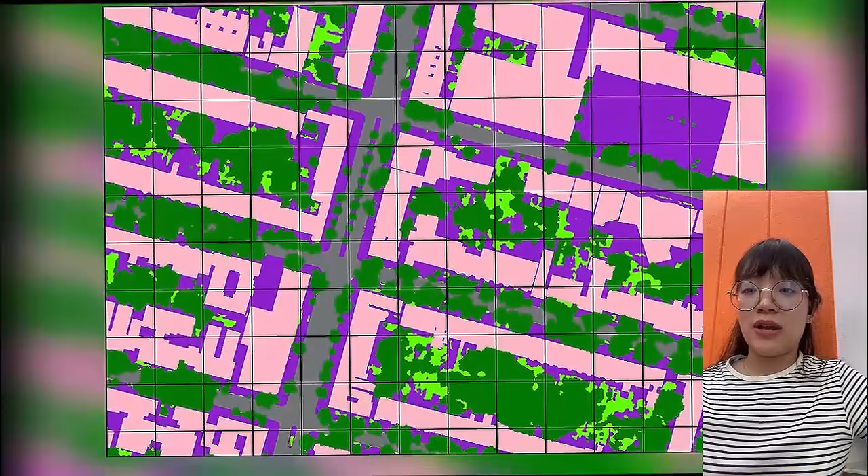Beyond the economic benefits, solar-powered buildings represent an important step toward a more sustainable future. They reduce greenhouse gas emissions, lower dependence on fossil fuel, and encourage the widespread adoption of renewable energy technology.

As governments around the world strengthen environmental regulations and pursue ambitious carbon neutral goals, energy-generating buildings are becoming symbols of innovation, responsibility, and environmental stewardship. Today, the idea of a building acting as its own power station is no longer a distant dream. It has become one of the defining trends of 21st century green architecture.

Around the world, groundbreaking projects demonstrate that buildings can do much more than provide shelter. They can actively produce clean energy, protect the environment, and reshape the future of sustainable urban living. As technology continues to evolve, the buildings of tomorrow may no longer be remembered simply for their height or appearance, but for their remarkable ability to generate the very energy that powers modern civilization.

Along with this rapid urban development comes an enormous increase in energy consumption. From air conditioning systems and elevators to computers, lighting, electric vehicles, and smart appliances, modern life depends on a constant and reliable supply of electricity. Experts predict that global energy demand will continue to rise for decades, placing unprecedented pressure on existing power grids.

For more than a century, much of the world's electricity has been generated by burning fossil fuels such as coal, oil, and natural gas. While these energy sources have fueled economic development and technological progress, they have also produced enormous amounts of carbon dioxide and other greenhouse gases.

These emissions trap heat in the Earth's atmosphere, contributing to global warming, rising sea levels, more frequent extreme weather events, and the gradual destruction of ecosystems around the world. The environmental cost of traditional electricity generation has become one of the great challenges facing humanity in the 21st century.

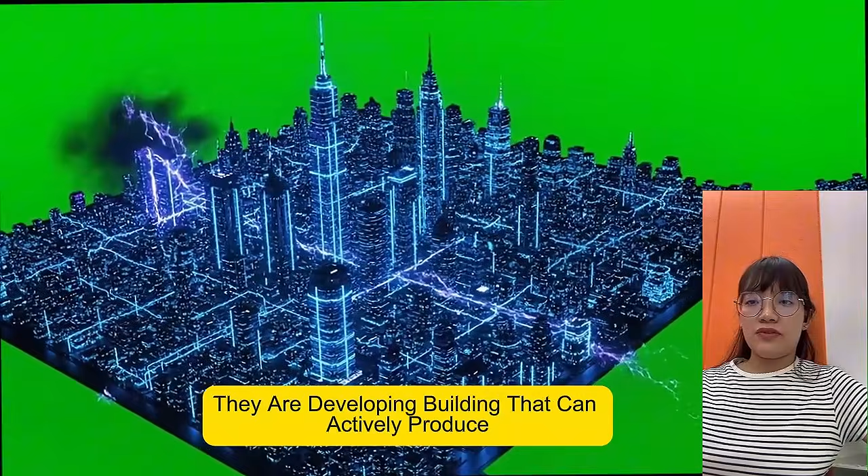This growing crisis has inspired architects, engineers, and environmental scientists to rethink the role of buildings in the global energy system. Instead of designing structures that simply consume electricity, they are developing buildings that can actively produce clean, renewable energy while minimizing waste. This represents a major shift in architectural philosophy.

Today, successful buildings are no longer judged solely by their appearance, height, or functionality. Increasingly, they are evaluated by how efficiently they use resources, how much energy they can generate, and how small their environmental footprint is. The goal is to transform every building into a self-sustaining energy system.

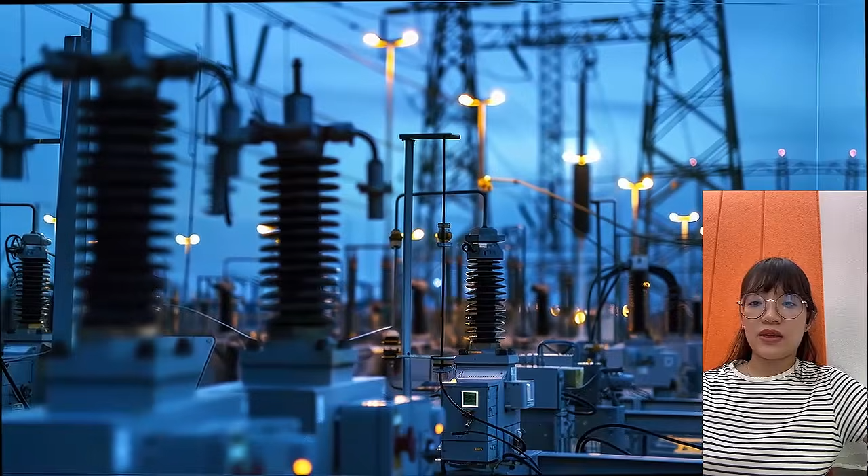Rather than relying entirely on electricity supplied by distant power plants, modern buildings can harvest energy directly from natural resources available on site. Solar panels capture sunlight throughout the day. Rooftop wind turbines generate electricity from moving air. Geothermal systems utilize the Earth's natural heat.

An advanced energy management system optimizes power consumption in real time. Together, these technologies enable buildings to produce a significant portion, or even all, of the electricity they require for daily operation. The benefits of solar power buildings extend far beyond lower electricity bills.

One of the most significant advantages is a dramatic reduction in greenhouse gas emissions. Every unit of renewable electricity generated by a building reduces the need for electricity produced by fossil fuel power plants, helping to combat climate change and improve air quality.

At the same time, building owners can save substantial amounts of money by reducing their dependence on the public electrical grid. Over the lifetime of a building, these savings amount to millions of dollars, making renewable energy investment economically attractive as well as environmentally responsible.

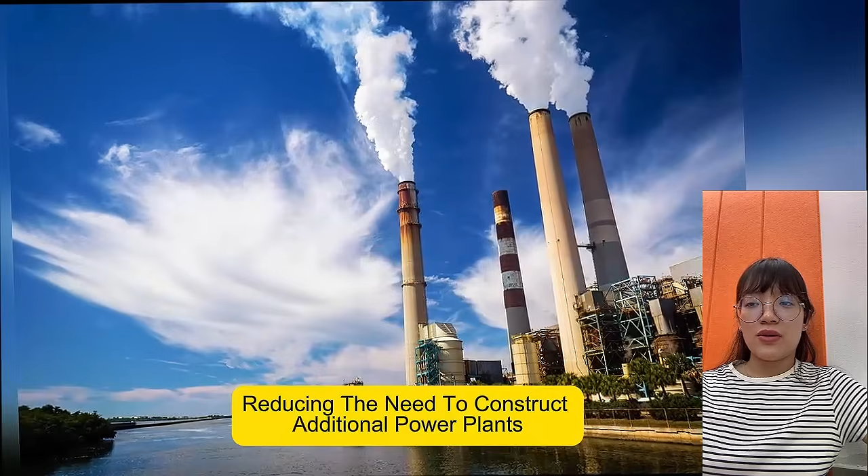Self-generating buildings also place less strain on national electricity networks. When thousands of buildings produce their own electricity, the overall demand on the grid decreases, reducing the need to construct additional power plants and expensive transmission infrastructure.

Some advanced buildings can even generate surplus electricity and feed it back into the public grid, effectively becoming small renewable power stations that support the surrounding community. This decentralized approach creates a more flexible, reliable, and sustainable energy system for the entire city.

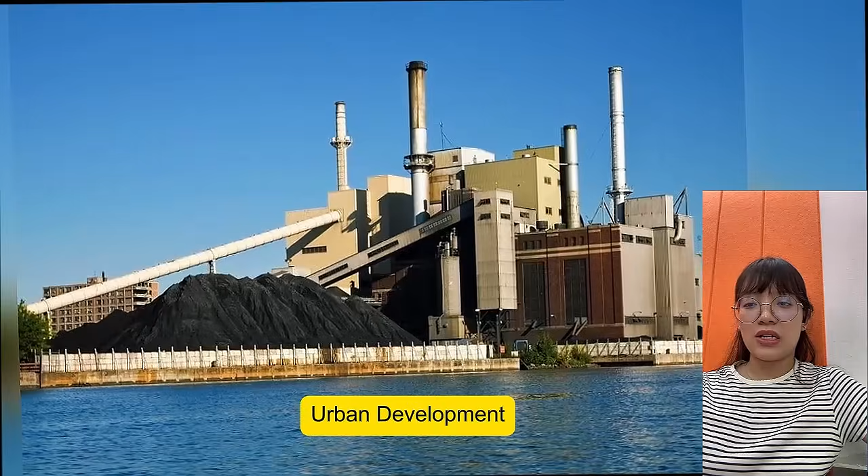Beyond the technical and financial advantages, energy-producing buildings represent a new vision for sustainable urban development. They encourage innovation, promote cleaner technology, and demonstrate that economic growth and environmental responsibility can coexist.

Around the world, governments introducing energy efficiency standards and carbon reduction targets make solar power buildings an increasingly important part of future construction. Many experts believe that in the coming decades, the ability to generate renewable energy will become a standard feature rather than a luxury.

Just as modern buildings are now expected to include internet connectivity, efficient insulation, and smart technology. Future buildings may all be designed to produce their own electricity. In this new era of green architecture, every rooftop, facade, and structure surface can potentially become an energy source, helping cities become cleaner, more resilient, and better prepared for the challenges of the future.

Part 3. The Edge, one of the smartest office buildings in the world. One of the world's most outstanding examples of sustainable architecture is the Edge, an innovative office building located in Amsterdam, the Netherlands.

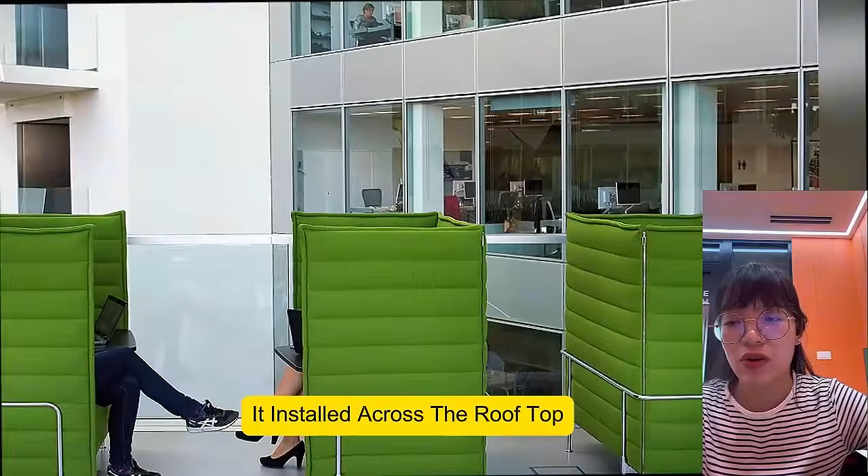One of the building's most impressive features is its extensive solar energy system. Thousands of high-efficiency photovoltaic panels are installed across the rooftop and integrated into parts of the building exterior. Throughout the day, these solar panels capture sunlight and convert it directly into renewable electricity.

The energy produced supplies a large portion of the building's daily power needs, including lighting, elevators, heating and cooling systems, ventilation equipment, and office electronics. By generating much of its own electricity, the Edge significantly reduces its dependence on the public power grid while lowering carbon emissions and operation costs.

However, what truly makes the Edge exceptional is not only the amount of electricity it generates, but also the way it uses the energy. The building is equipped with one of the world's most advanced smart sensor networks. Thousands of sensors are installed throughout the offices, meeting rooms, hallways, and social spaces. The intelligent devices continuously monitor occupancy, temperature, humidity, air quality, and lighting conditions in real time.

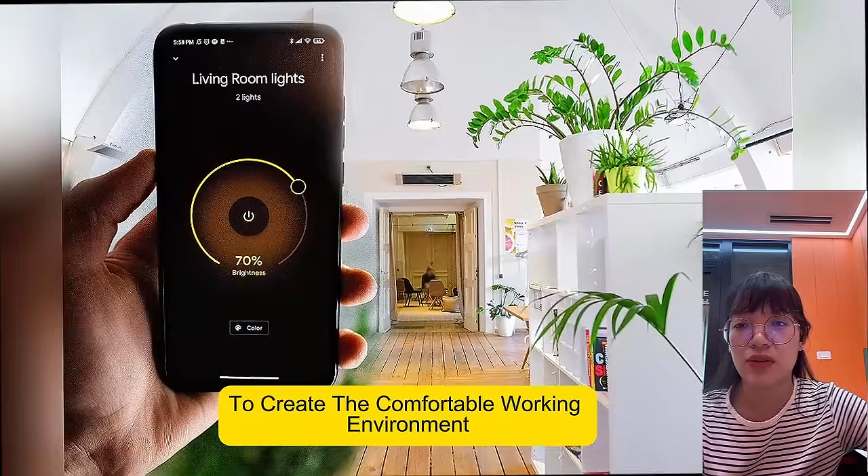Whenever an employee enters a room, the sensors immediately detect their presence. Lights automatically switch on and adjust their brightness according to the amount of natural daylight available. At the same time, the climate control system regulates the room temperature to create a comfortable working environment. Once the room becomes empty, unnecessary lighting and air conditioning are automatically reduced or turned off. As a result, electricity is consumed only where and when it is actually needed, eliminating much of the energy waste commonly found in conventional office buildings.

The building also makes excellent use of natural light. Large glass façades allow sunlight to reach deep into the interior, reducing the need for artificial lighting during daytime hours. Smart lighting systems constantly measure outdoor brightness and automatically adjust indoor illumination to maintain ideal working conditions while using the least possible amount of electricity.

All of this technology works together in an intelligent energy management system that continuously analyzes data and optimizes building performance. Every decision, from adjusting room temperature to controlling lighting, is designed to maximize comfort while minimizing energy consumption. This combination of renewable energy generation, artificial intelligence, and smart automation allows the building to achieve an extraordinary level of energy efficiency that far exceeds that of most traditional office buildings.

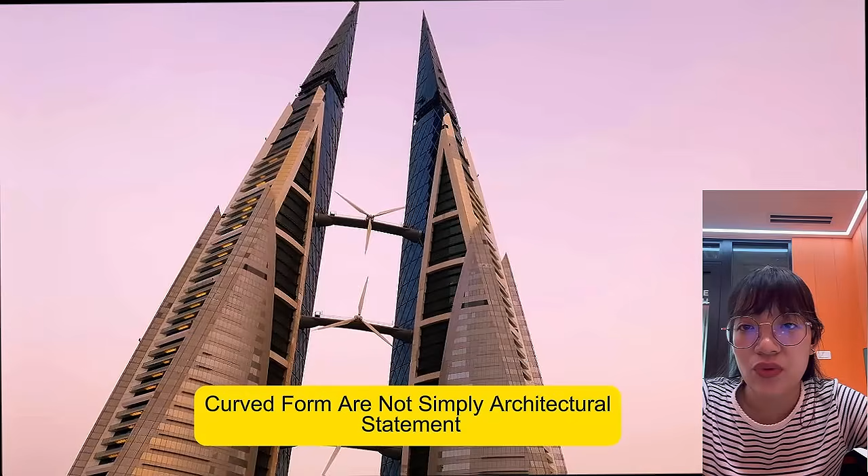Inspired by the traditional sail of the Arabian dhow, the towers reflect Bahrain's rich maritime heritage while also serving a highly practical engineering purpose. The unique curved forms are not simply architectural statements; they were carefully designed to manipulate wind flow and maximize renewable energy production.

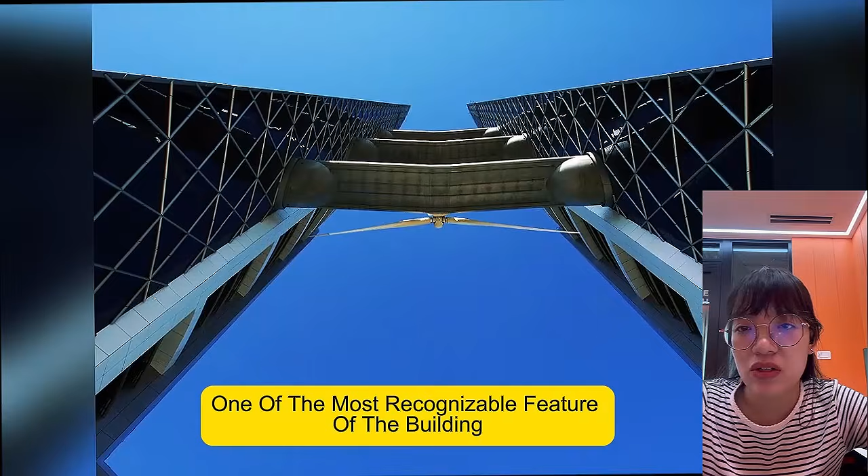Connecting the two towers are three enormous horizontal-axis wind turbines, each measuring approximately 29 meters in diameter. Suspended high above the ground on large steel bridges, these turbines create one of the most recognizable features of the building. Unlike conventional skyscrapers that rely entirely on electricity supplied by thermal power plants, the Bahrain World Trade Center is capable of generating part of its own clean energy by capturing one of the region's most abundant natural resources: wind.

The building's innovative design takes full advantage of the prevailing winds blowing across the Persian Gulf. Engineers carefully studied local wind patterns before construction began, using advanced computer simulation and wind tunnel testing to determine the optimal orientation of the towers.

The two sail-shaped structures are positioned so incoming wind naturally funnels into the open space between them. As the wind passes through the narrowing gap, its speed increases due to the venturi effect, a well-known principle in fluid dynamics where air accelerates as it flows through a confined passage. This natural acceleration allows the wind turbines to rotate more efficiently than they would if installed on conventional rooftops or in open fields.

Each of the three turbines operates independently, continuously converting the kinetic energy of moving air into electrical power. Whenever wind conditions are favorable, the spinning blades drive electrical generators that produce clean, renewable electricity without burning fossil fuel or releasing greenhouse gases. The electricity generated is supplied directly to the building, helping power common area lighting, elevators, ventilation systems, and various shared electrical facilities.

Although the wind turbines do not produce enough electricity to operate the entire skyscraper, they are capable of supplying a meaningful percentage of the building's annual energy demand under normal operating conditions. The turbines can provide approximately 11 to 15% of the building's total electricity consumption over the course of a year. This represents hundreds of megawatt-hours of clean energy and prevents the emission of hundreds of tons of carbon dioxide that would otherwise result from conventional electricity generation.

Integrating massive wind turbines into a high-rise building presents significant engineering challenges. The turbines need to withstand powerful wind, vibration, and changing weather conditions, and continue operation over many years. Engineers designed specialized steel bridges capable of supporting the turbines while minimizing structural movement and vibration. Advanced control systems constantly monitor wind speed, turbine rotation, and mechanical performance to ensure safe and efficient operation.

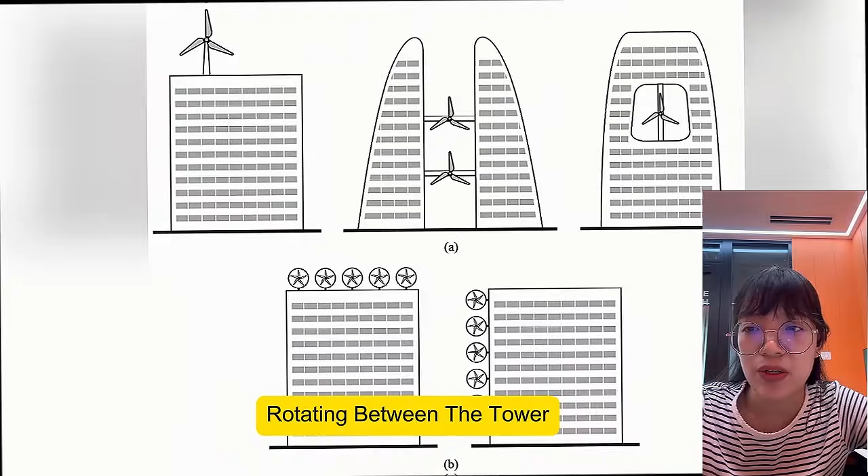Another remarkable achievement of the Bahrain World Trade Center is the way renewable energy technology becomes an integral part of the building's identity. Unlike many sustainable systems that remain hidden from public view, the three giant turbines are impossible to ignore. Visitors and residents can immediately see the blades rotating between the towers, providing a powerful visual reminder that clean energy can become a natural part of everyday urban life.

The building itself serves as an educational symbol, demonstrating that renewable energy technology can be both functional and architecturally inspiring.

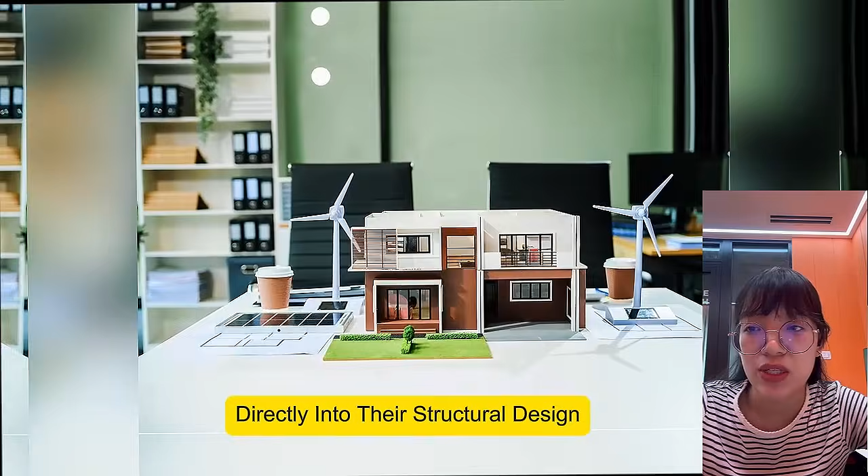Beyond the technical innovation, the Bahrain World Trade Center has a lasting influence on sustainable architecture around the world. Before its construction, very few skyscrapers had attempted to incorporate large-scale wind power directly into their structural design. Its success proved that renewable energy systems could be integrated into high-rise buildings without compromising aesthetics, safety, or commercial functionality. Since then, architects and engineers have explored new ways to incorporate wind energy into urban environments, drawing inspiration from the pioneering concept demonstrated in Bahrain.

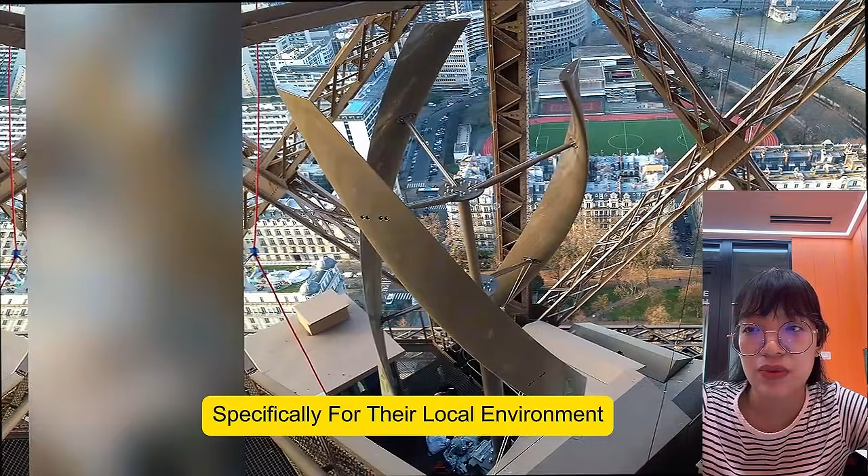The project also highlights the importance of designing buildings specifically for their local environment. Rather than applying a one-size-fits-all solution, the architects carefully considered Bahrain's climate, geography, and prevailing wind conditions. The result is a building uniquely adapted to its location, showing that sustainable architecture depends on understanding and working with nature instead of resisting it.

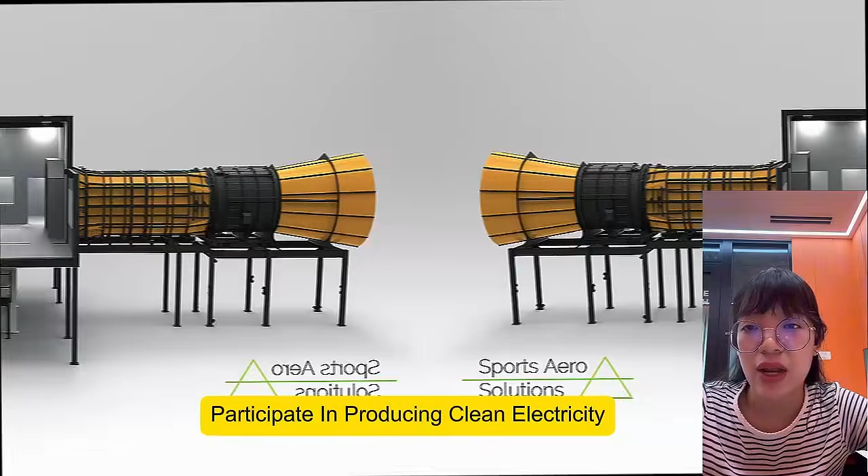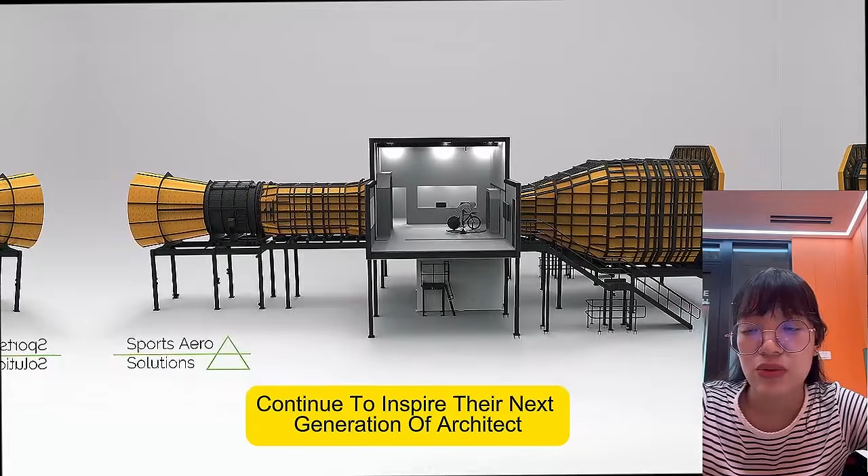Today, the Bahrain World Trade Center remains one of the world's most iconic examples of renewable energy architecture. It stands as proof that skyscrapers can become more than places to live and work. They can actively participate in producing clean electricity while reducing dependence on fossil fuels. As cities continue searching for innovative ways to lower carbon emissions and improve energy efficiency, this remarkable building continues to inspire the next generation of architects, engineers, and urban planners. Its soaring towers and giant wind turbines symbolize a future in which architecture is no longer merely a consumer of energy, but an active contributor to a cleaner, greener, and more sustainable world.

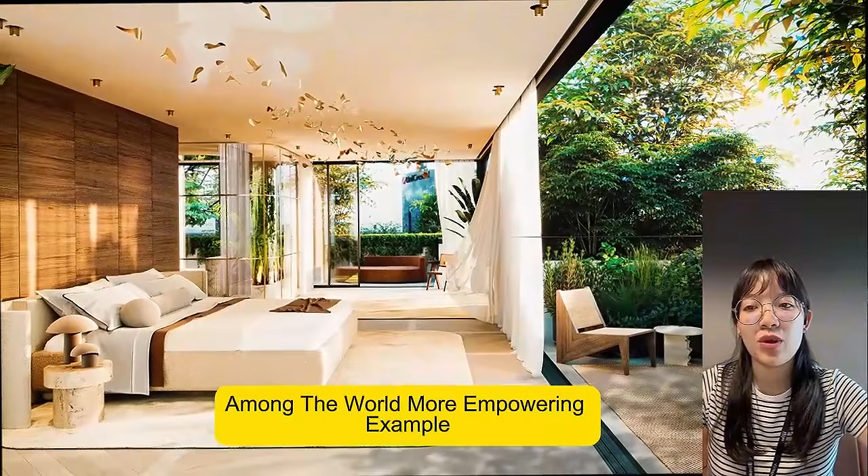Part 5. Bosco Verticale, where nature and clean energy work together. Among the world's most inspiring examples of sustainable architecture is Bosco Verticale, the vertical forest.

Located in Milan, Italy, unlike most modern skyscrapers that rely primarily on steel, glass, and concrete.

Bosco Verticale introduces an entirely different vision of urban living, one in which nature becomes an essential part of the building itself. Covered with thousands of trees, shrubs, and flowering plants, this remarkable residential tower has become an international symbol of green architecture, demonstrating that living vegetation can work alongside advanced technology to create healthier, more energy-efficient buildings.

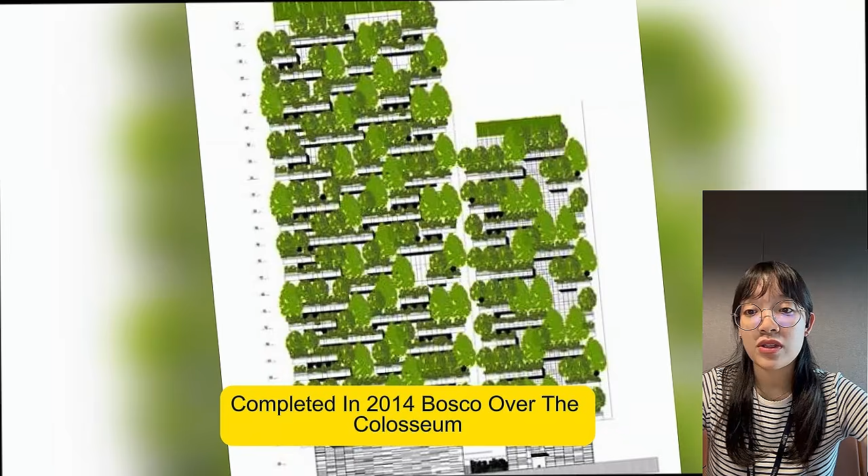Completed in 2014, Bosco Verticale consists of two residential towers rising approximately 80 and 112 meters above the city. What immediately captures attention is the extraordinary amount of greenery covering the balconies. More than 800 mature trees, over 4,500 shrubs, and approximately 15,000 perennial plants have been carefully planted throughout the building. Together, this vegetation is equivalent to the ecological benefits of a small forest, spread vertically across the facades instead of occupying valuable land at street level.

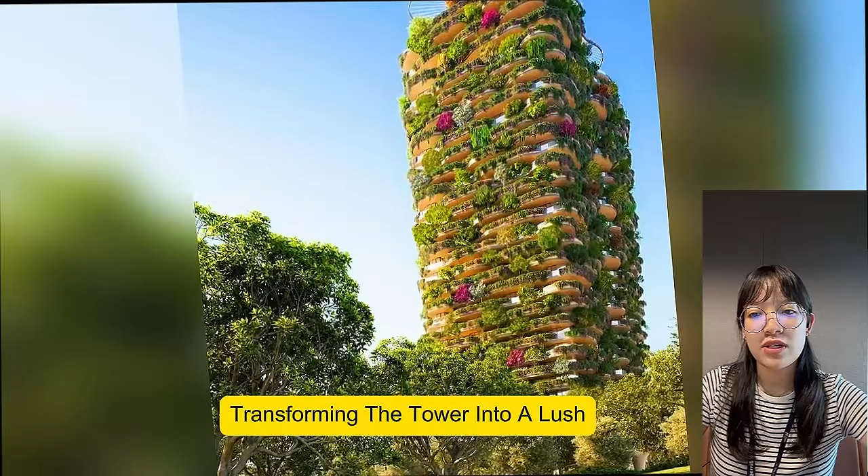At first glance, the trees appear to serve only an aesthetic purpose, transforming the tower into a lush green landmark within the urban skyline. However, their true value extends far beyond beauty. Every tree and plant has been carefully selected and positioned to perform specific environmental functions that directly improve the building's energy efficiency while creating a healthier living environment for residents.

One of the greatest challenges faced by modern buildings is managing heat. During the summer months, sunlight striking glass windows and concrete walls causes indoor temperatures to rise rapidly.

Conventional buildings often rely heavily on air conditioning systems to maintain comfortable conditions, leading to enormous electricity consumption. Bosco Verticale approaches this challenge in an entirely different way by allowing nature to perform much of the work.

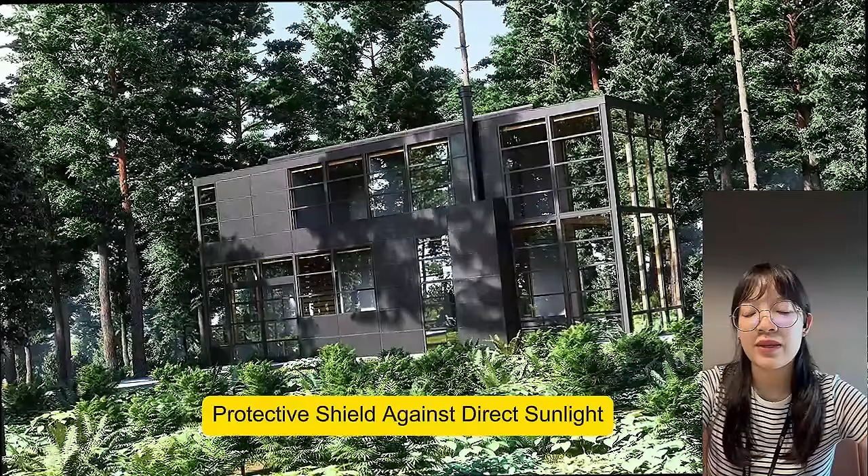The dense vegetation covering the balconies acts as a natural protective shield against direct sunlight. Tree canopies provide shade from windows, balconies, and exterior walls, preventing excess solar radiation from reaching the building envelope. As a result, significantly less heat enters the apartment, reducing indoor temperature naturally before mechanical cooling systems are even required. This passive cooling effect rapidly lowers the demand for air conditioning during Milan's warm summers, resulting in substantial energy savings.

The cooling benefits extend beyond simple shading. Through the natural process of transpiration, trees release water vapor into the surrounding air. As this moisture evaporates, it absorbs heat from the environment, producing a localized cooling effect similar to natural air conditioning. This process helps create a more comfortable microclimate, not only for residents but also for the surrounding neighborhood, contributing to the reduction of the urban heat island effect commonly experienced in large cities.

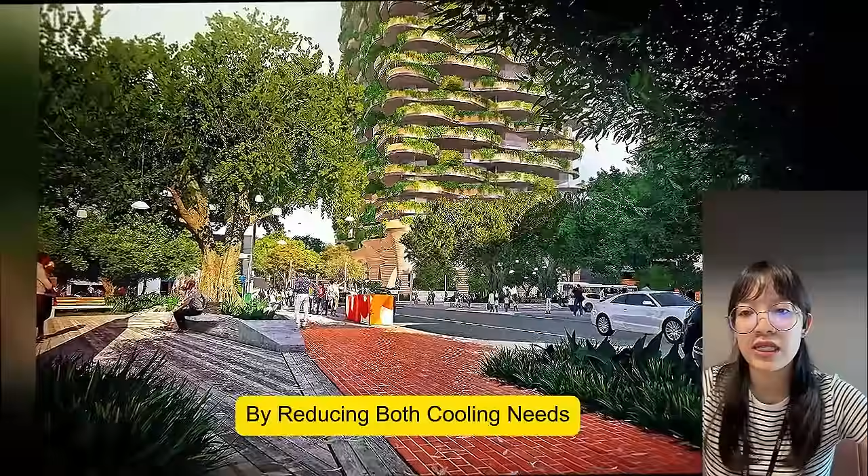During winter, the vegetation provides a different but equally valuable function. The branches and foliage create an additional insulating layer around portions of the building, helping reduce heat loss from the interior. Combined with modern insulation materials and high-performance windows, this natural barrier decreases the amount of energy required for heating. By reducing both cooling needs in summer and heating demand in winter, Bosco Verticale achieves impressive energy efficiency throughout the entire year.

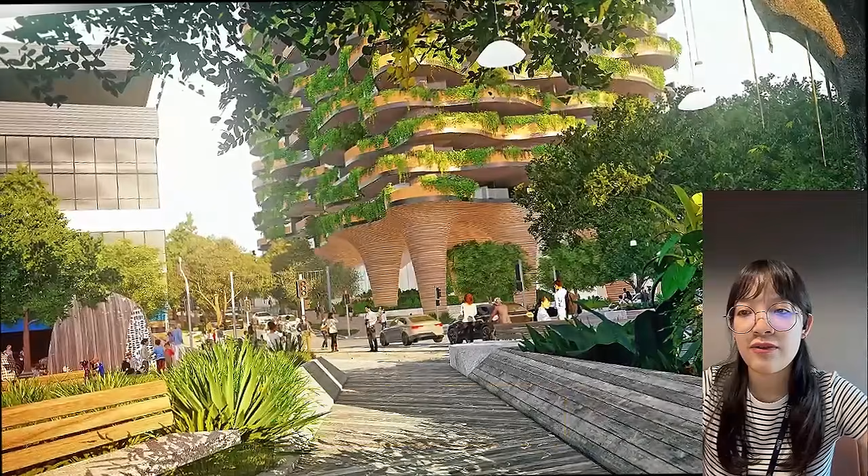Nature is only one component of the building's sustainability strategy. Bosco Verticale also operates modern renewable energy technology, including solar panels and advanced energy saving systems designed to reduce dependence on conventional electric resources. The solar installations contribute clean, renewable electricity that supports a portion of the building's energy requirements, while highly efficient mechanical systems ensure that every unit of energy is used as effectively as possible.

Sophisticated energy management technology continuously monitors lighting, ventilation, heating, and water consumption throughout the building. Efficient LED lighting, modern insulation materials, intelligent climate control systems, and optimized building operations work together with renewable energy generation to minimize electricity consumption without compromising resident comfort.

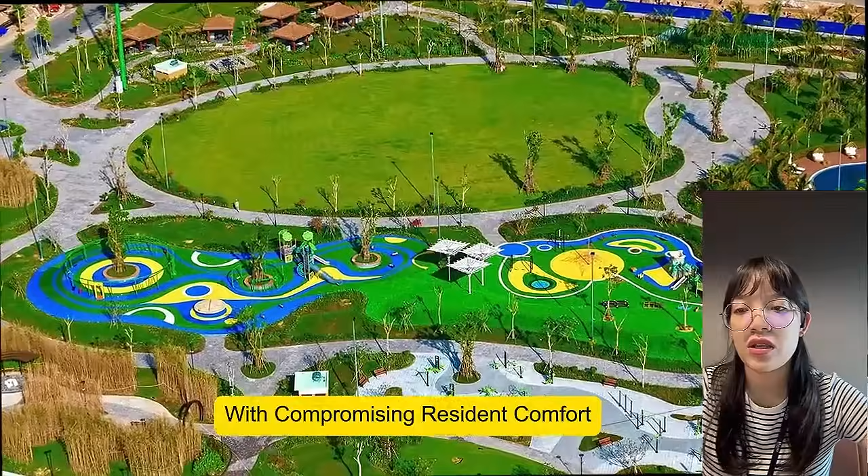Water management also plays a central role in maintaining the vertical forest. Irrigation systems use treated wastewater and a carefully controlled distribution network to provide trees and plants with the precise amount of water required. Sensors continuously monitor soil moisture and environmental conditions, ensuring healthy plant growth while minimizing unnecessary water use. This intelligent integration of technology and nature demonstrates that sustainable architecture depends upon carefully balancing multiple environmental systems.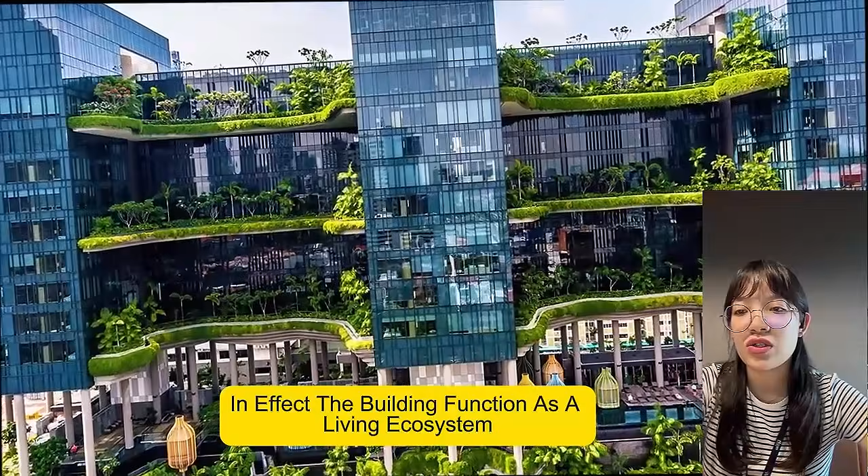Perhaps the most remarkable contribution of Bosco Verticale is its ability to improve urban air quality. The thousands of trees planted continuously absorb carbon dioxide while releasing oxygen into the atmosphere through photosynthesis. They also capture fine dust particles, filter airborne pollutants, and help reduce noise pollution throughout the surrounding area. In effect, the building functions as a living ecosystem rather than simply a collection of apartments.

The ecological benefits extend to wildlife as well. Birds, butterflies, bees, and numerous beneficial insects have found habitats among the extensive vegetation, increasingly supporting biodiversity within one of Europe's busiest metropolitan areas. What was once a conventional urban environment has been transformed into a thriving vertical ecosystem that supports both human life and local wildlife.

Bosco Verticale demonstrates important principles of sustainable architecture. Renewable energy does not always come directly from solar panels or wind turbines. Sometimes the most effective energy-saving solution comes from working with nature itself. Every degree of cooling provided by shade, every reduction in heating demand created by natural insulation, and every improvement in air quality achieved by living vegetation indirectly reduces electricity consumption.

In this sense, the forest covering the tower becomes a form of indirect energy generation, lowering the building's overall energy needs before electricity even has to be produced. Today, Bosco Verticale has become one of the world's most celebrated examples of environmentally responsible design.

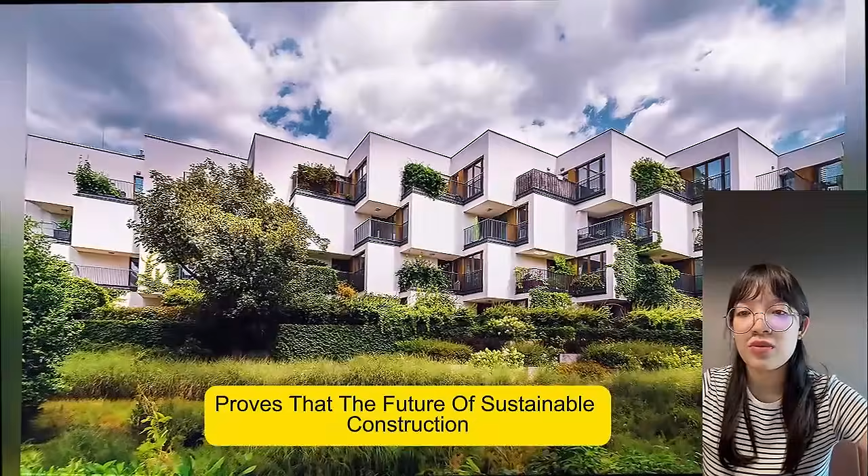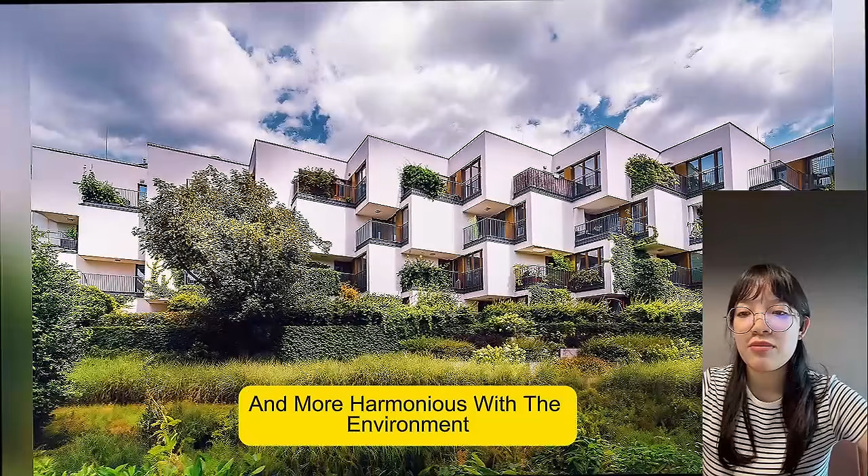Architects, urban planners, and governments from around the globe are studying an innovative approach as cities search for new ways to combat climate change, reduce carbon emissions, and improve the quality of urban life. More than just architecture, Bosco Verticale proves that the future of sustainable construction may not depend solely on advanced technology. Instead, it demonstrates that by combining renewable energy systems with the timeless power of nature, modern buildings can become healthier, more efficient, and more harmonious with the environment than ever before.

Part C: The building that produces more electricity than it uses. In the heart of Seattle, Washington, USA, stands one of the world's most remarkable examples of sustainable architecture, the Bullitt Center. Often described as one of the greenest commercial buildings ever constructed, it was designed with a bold and ambitious goal: to prove that a modern office building can operate without relying heavily on conventional energy sources, by producing more electricity than it consumes. Rather than simply reducing environmental impact, the building was created to become a positive contributor to the surrounding community, demonstrating what the future of sustainable construction can truly look like.

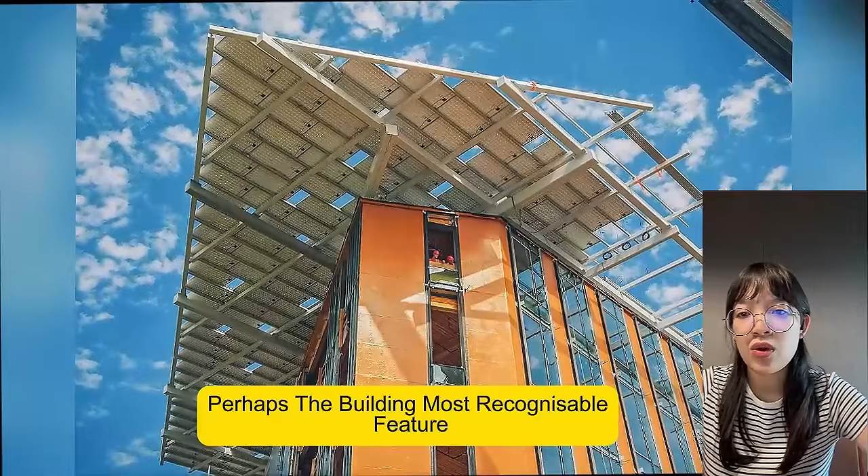Completed in 2013, the Bullitt Center immediately attracted international attention for its innovative approach to energy efficiency, water conservation, and environmental responsibility. Every aspect of the building was carefully planned to minimize resource consumption while maximizing renewable energy production. Instead of viewing sustainability as an optional feature, the architects and engineers treated it as the foundation of the entire project.

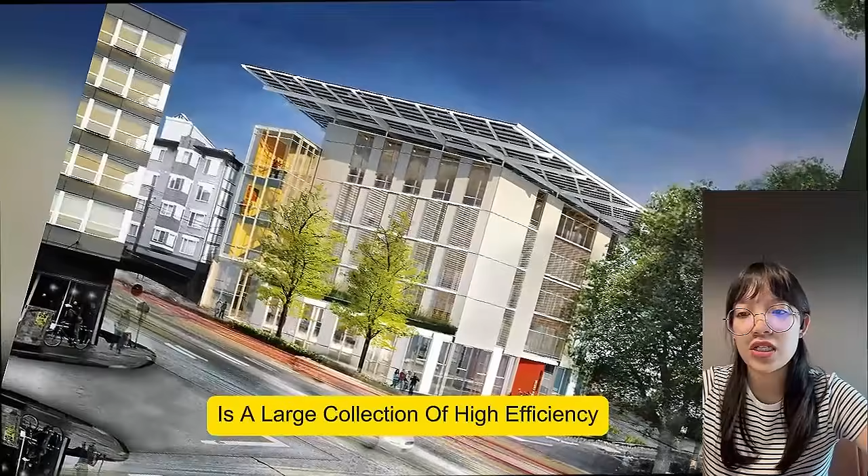Perhaps the building's most recognizable feature is the expansive rooftop solar array. Covering nearly the entire roof is a large collection of high-efficiency photovoltaic panels specifically designed to capture as much sunlight as possible throughout the year. Although Seattle is famous for its rainy weather and cloudy skies, careful engineering and advanced solar technology allow the Bullitt Center to generate an impressive amount of clean electricity, even under less than perfect conditions.

The rooftop solar system serves as the building's primary source of power throughout the day. Sunlight is converted directly to electricity that supplies lighting, computers, office equipment, elevators, ventilation systems, and many other essential building operations. Every kilowatt-hour generated by the solar panels reduces dependence on fossil fuel-generated electricity while lowering greenhouse gas emissions and operating costs.

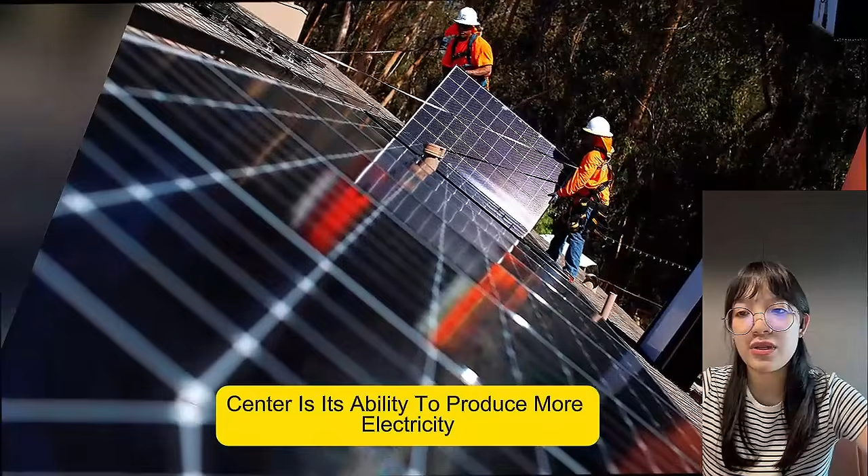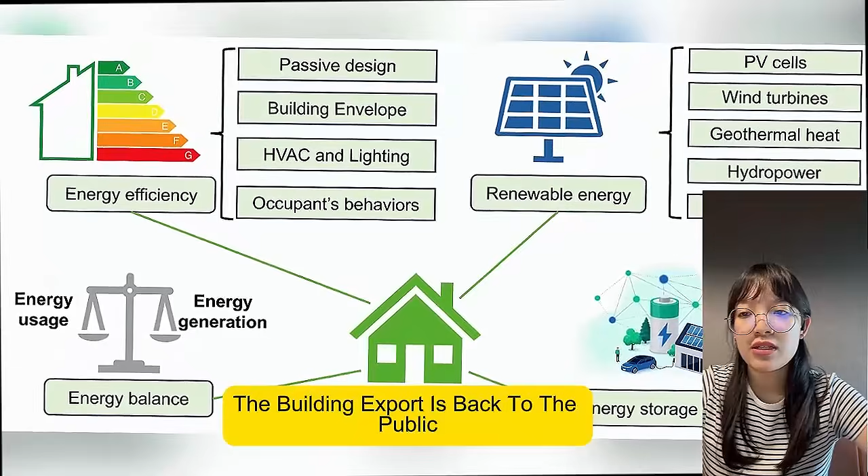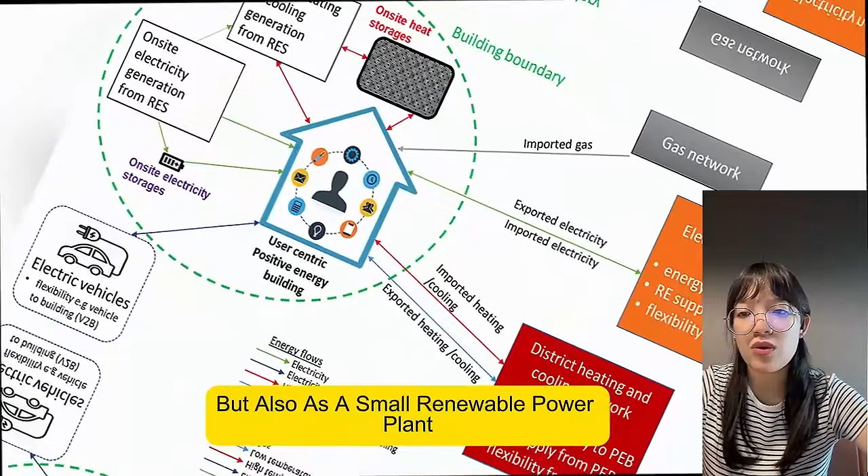One of the most extraordinary achievements of the Bullitt Center is its ability to produce more electricity than it consumes during favorable conditions. On bright sunny days, the solar array often generates a surplus of renewable energy that exceeds the building's immediate needs. Instead of allowing the excess electricity to go to waste, the building exports it back to the public electrical grid. In effect, the Bullitt Center functions not only as an office building, but also as a small renewable power plant that contributes clean energy to the surrounding community.

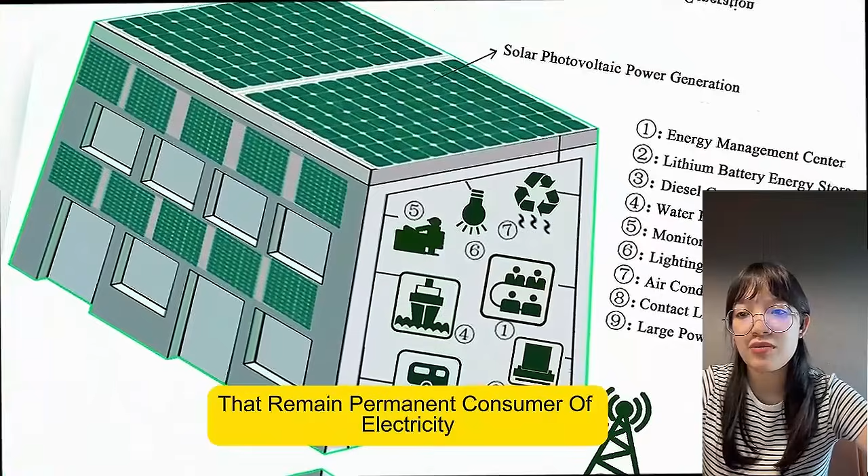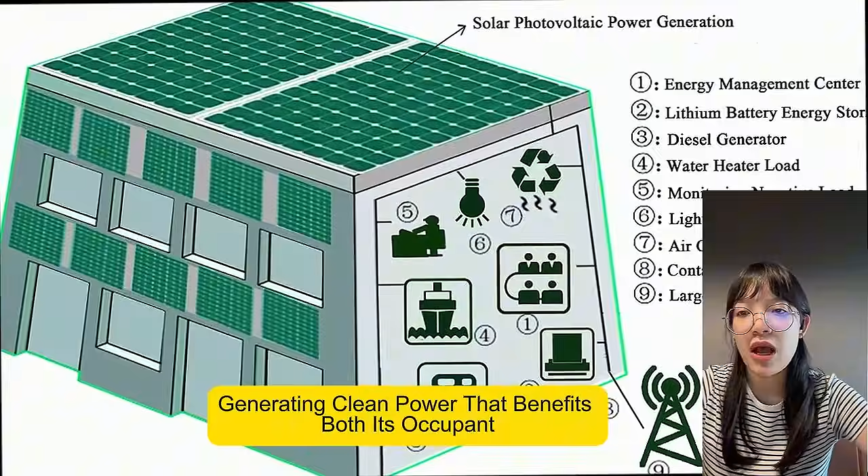This concept, often referred to as a net positive energy building, represents one of the highest standards in sustainable architecture. Unlike conventional buildings that remain permanent consumers of electricity, a net positive building becomes an active participant in the energy system, generating clean power that benefits both its occupants and neighboring properties. This approach demonstrates how a commercial building can help strengthen local energy infrastructure while reducing the need for electricity generated by coal, natural gas, or other fossil fuels.

However, renewable electricity generation alone does not explain the Bullitt Center's remarkable performance. Producing more energy than a building consumes is only possible because the building has been designed to require remarkably little energy in the first place. Every component has been optimized to maximize efficiency and eliminate unnecessary waste.

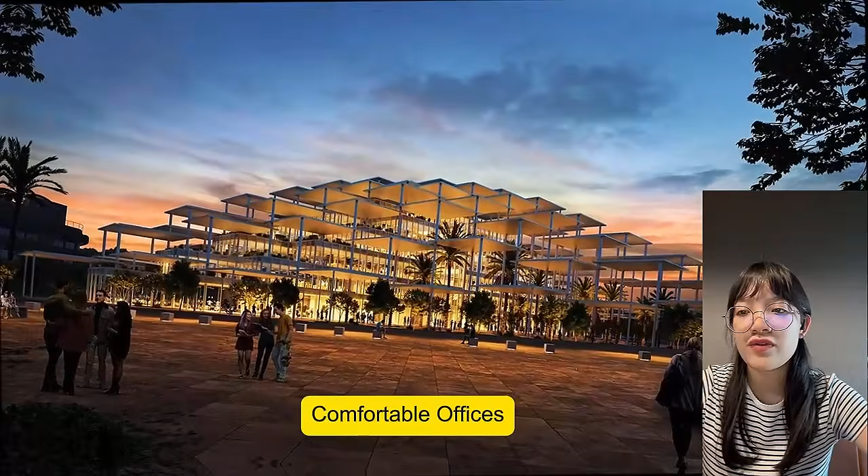Natural daylight plays a central role in the strategy. Large windows allow sunlight to penetrate deep into the interior, dramatically reducing the need for artificial lighting during daytime hours. Careful building orientation and architectural design ensure that workspaces receive abundant daylight while minimizing excessive heat gain. Employees enjoy bright, comfortable offices illuminated primarily by natural light rather than electricity. When artificial lighting is required, highly efficient LED fixtures are used throughout the building.

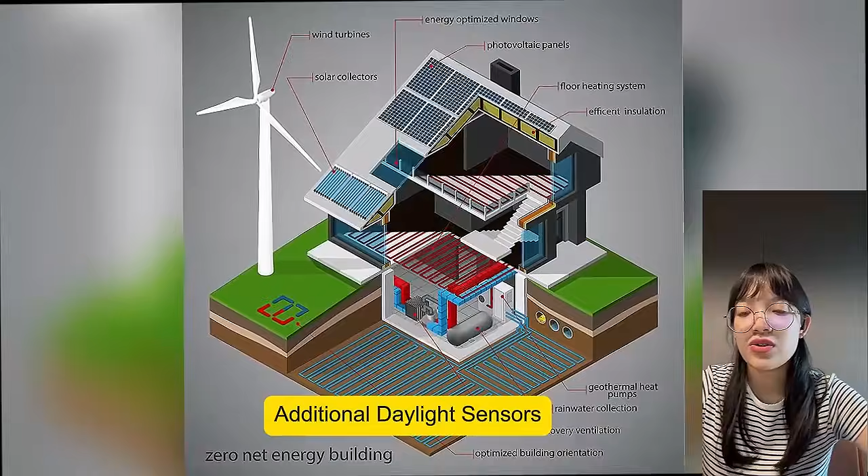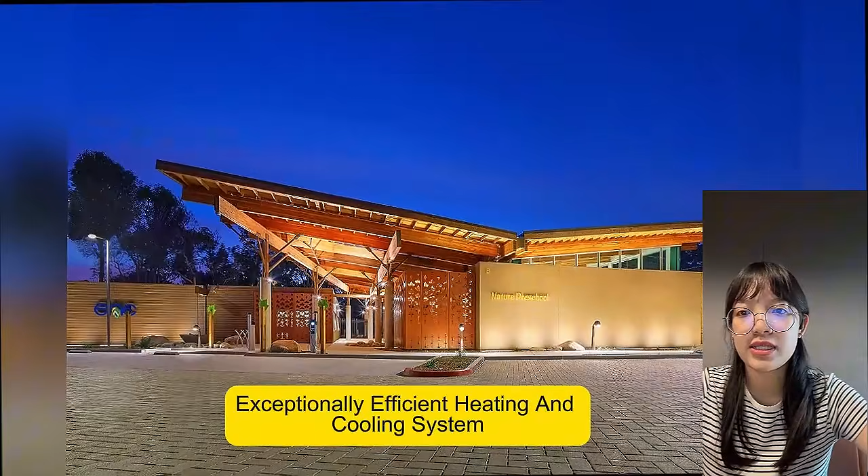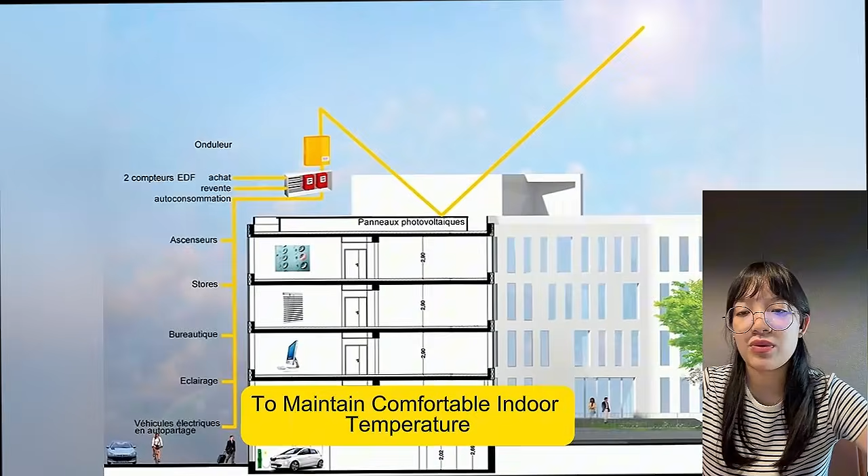Motion sensors and occupancy detectors automatically switch lights on only when rooms are occupied and turn off when spaces become vacant. Additional daylight sensors continuously adjust lighting intensity according to the amount of sunlight entering the building, ensuring that no electricity is wasted. The Bullitt Center also incorporates an exceptionally efficient heating and cooling system. Rather than relying on conventional air conditioning methods, the building uses advanced ventilation technology, superior insulation, and carefully engineered thermal systems to maintain comfortable indoor temperatures with minimal energy consumption. Operable windows allow occupants to enjoy fresh outdoor air whenever conditions permit, further reducing dependence on mechanical climate control equipment.

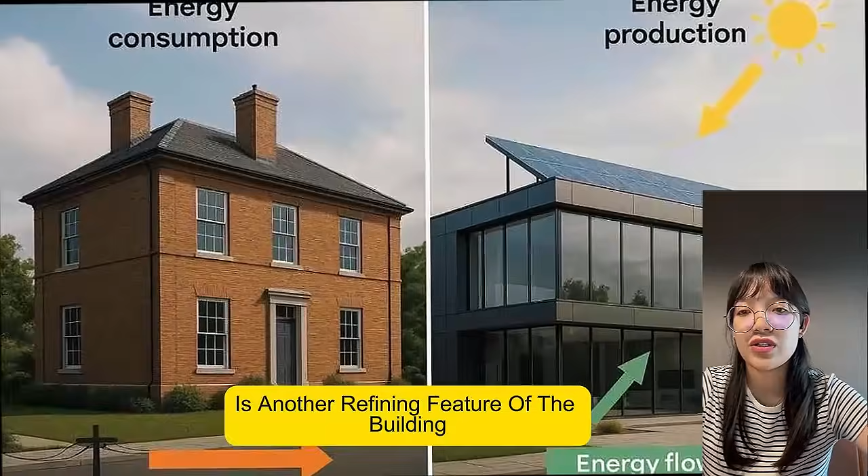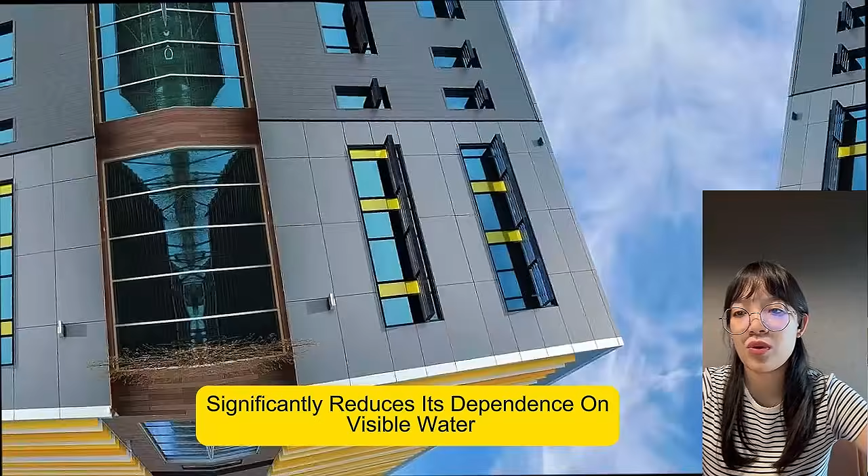Water conservation is another defining feature of the building's sustainable design. Rainwater falling onto the roof is carefully collected, stored, and given appropriate treatment for various building uses. This system significantly reduces dependence on municipal water supply while making productive use of one of Seattle's most abundant natural resources.

Advanced filtration technology ensures that collected rainwater meets strict quality standards before being utilized. The Village Center also incorporates innovative wastewater treatment and water recycling systems that radically reduce freshwater consumption. Water is carefully managed throughout the building to ensure every drop is used as efficiently as possible. Low flow plumbing fixtures, efficient appliances, and intelligent water management technology further minimize resource consumption while maintaining excellent performance per occupant.

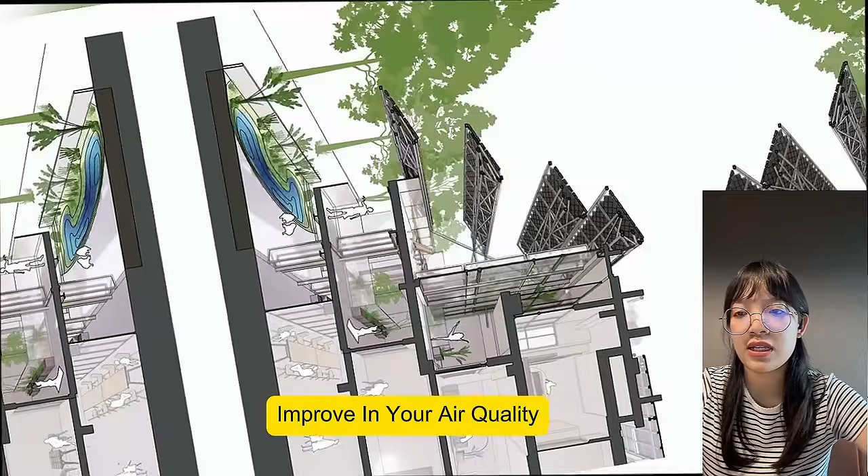Even the building materials reflect a commitment to sustainability. The environmentally responsible construction materials were selected to reduce harmful chemicals, improve indoor air quality, and ensure long-term durability. The design emphasizes products with low environmental impact throughout the entire life cycle, from manufacturing and transportation to maintenance and eventual recycling.

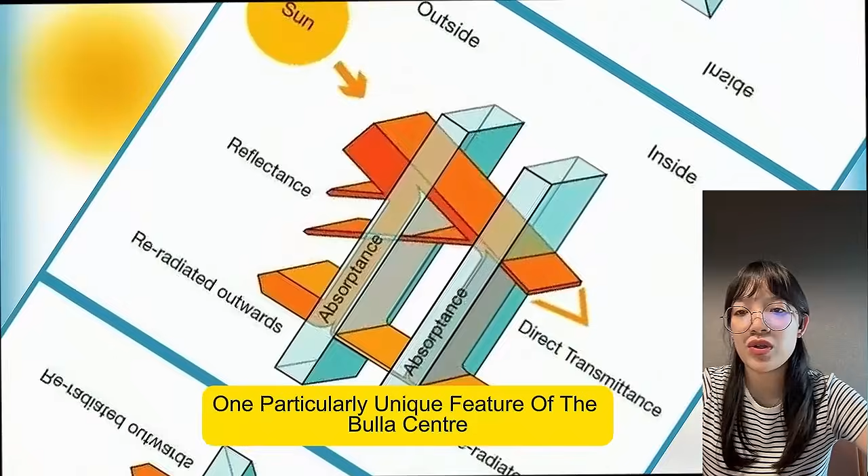One particularly unique feature of the Bullitt Center is the encouragement of a healthy lifestyle. Instead of placing an elevator at the center of the building, the architects designed an attractive, naturally lit staircase that encourages occupants to walk between floors whenever possible. This simple architectural decision reduces elevator use, saves electricity, and promotes physical activity among employees.

The Bullitt Center has become an international symbol of what is possible when renewable energy, intelligent engineering, and thoughtful architectural design are combined into a single vision. It's proof that commercial office buildings do not have to be major consumers of energy or contributors to climate change.

Instead, they can become highly efficient systems capable of generating clean electricity, conserving water, minimizing waste, and supporting a healthier working environment. Today, architects, engineers, government and environmental organizations around the world look to the Bullitt Center as a model for the future of sustainable construction.

Its success demonstrates that buildings can evolve beyond merely reducing their environmental footprint. They can actively create positive environmental benefits by producing more electricity than they consume, recycling valuable resources, and operating with extraordinary efficiency. The Bullitt Center offers a compelling glimpse into a future where buildings have the potential to become clean energy producers and essential parts of a more sustainable world.

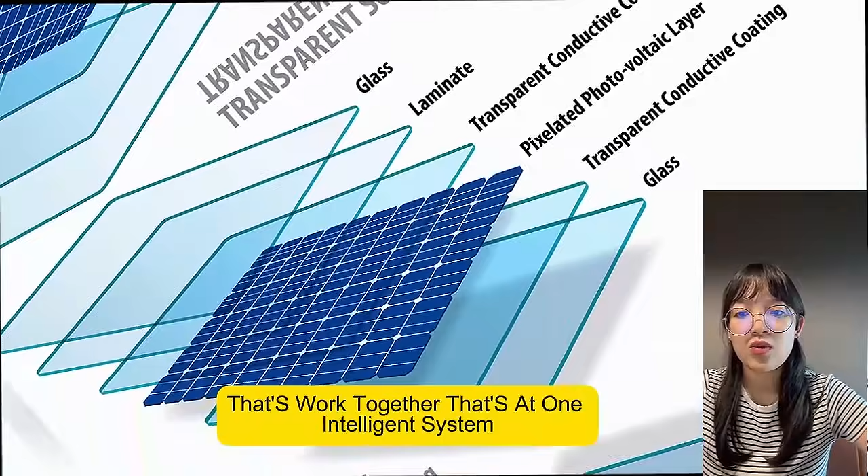Modern energy generating buildings rely on a combination of advanced technologies that work together as one intelligent system. Each technology plays a specific role in producing, storing, managing, and conserving energy, allowing the building to operate with far greater efficiency than traditional structures. By integrating multiple renewable energy sources with a smart management system, today buildings are becoming increasingly capable of meeting their own energy needs while reducing their dependence on the conventional power grid.

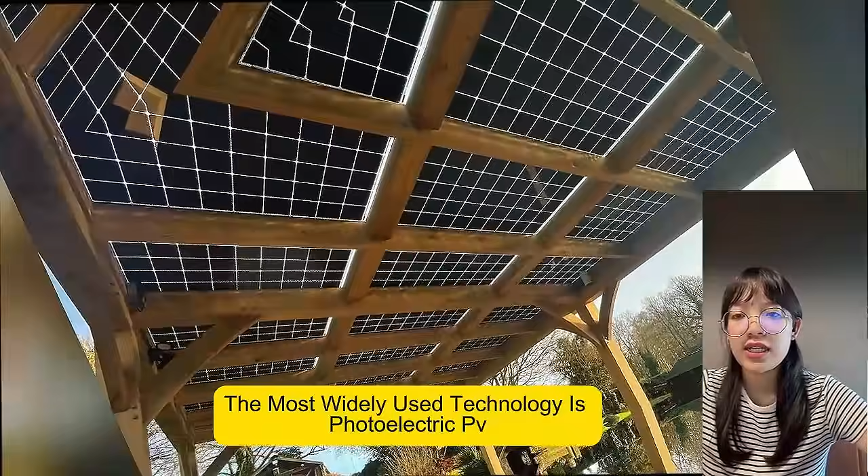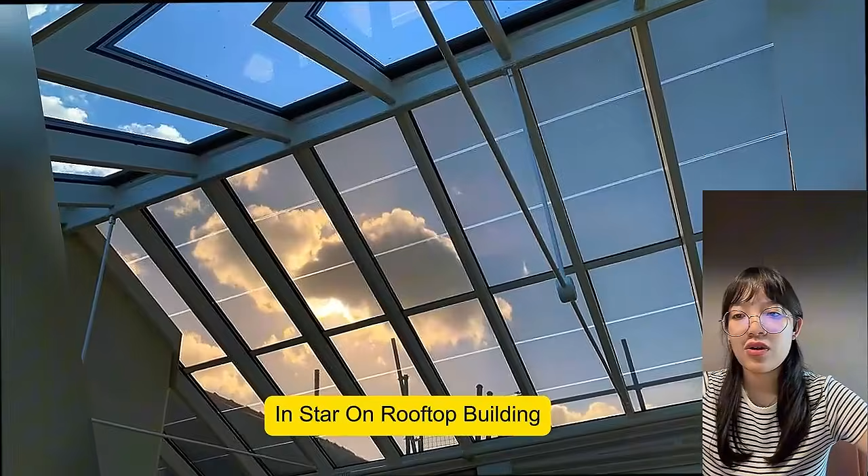The most widely used technology is photovoltaic, or PV, solar panels. These panels contain semiconductor material that converts sunlight directly into electricity through the photovoltaic effect. Installed on rooftops, building facades, or even integrated into architectural elements, solar panels quietly generate clean, renewable energy throughout the day without producing greenhouse gas emissions or air pollution.

As solar technology continues to improve, modern photovoltaic systems have become more efficient, more affordable, and capable of generating significant amounts of electricity even under partially cloudy conditions.

Another important source of renewable energy is wind power. Buildings located in areas with consistent airflow can incorporate wind turbines to capture the kinetic energy of moving air. Some skyscrapers are specifically designed to channel natural wind between towers, increasing wind speed and improving turbine performance. As the blades rotate, generators convert mechanical energy into electricity that can be used to power lighting, elevators, ventilation systems, and other building operations.

Wind energy complements solar power because it can continue producing electricity during cloudy weather and in many locations throughout the night.

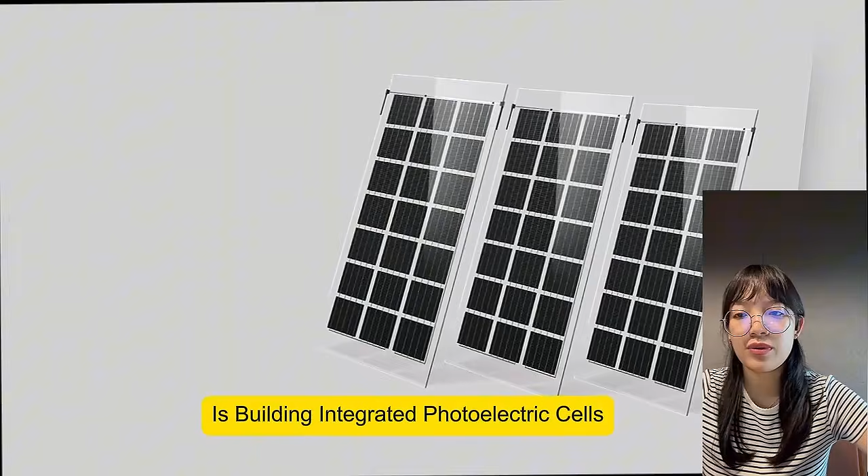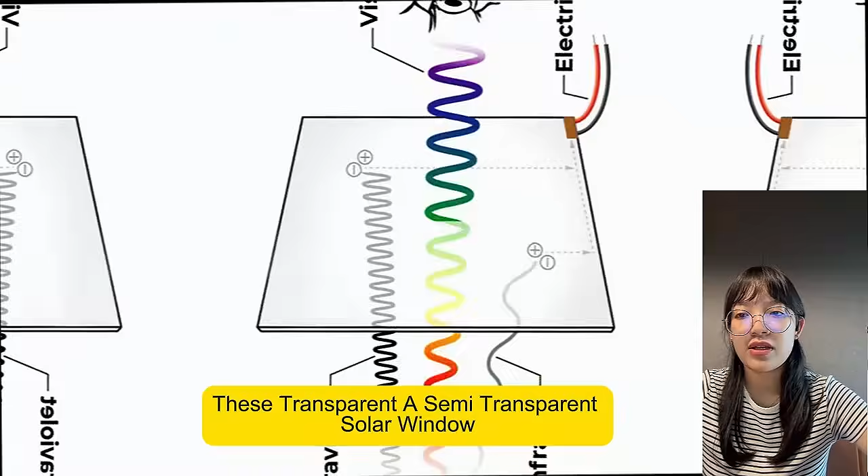One of the newest innovations in sustainable architecture is building integrated photovoltaics. Instead of placing solar panels only on rooftops, engineers have developed special glass panels that contain photovoltaic cells within the window or exterior facade. These transparent or semi-transparent solar windows allow natural daylight to enter the building while simultaneously generating electricity.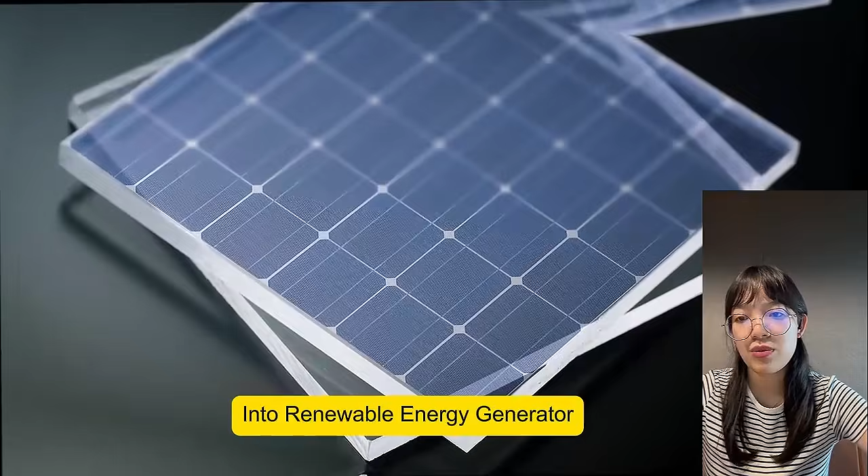As cities become increasingly crowded and rooftop space becomes more limited, photovoltaic glass offers an efficient way to transform entire building surfaces into renewable energy generators without compromising architectural design.

Closely related to this technology is the transparent solar panel, which can be installed directly onto a window while maintaining visibility. Although this system currently generates less electricity than conventional solar panels, ongoing research continues to improve their efficiency. In the future, millions of windows on office towers and residential buildings could become invisible power generators, dramatically increasing the amount of renewable energy produced in urban environments.

Many advanced buildings also utilize geothermal energy systems beneath the earth's surface.

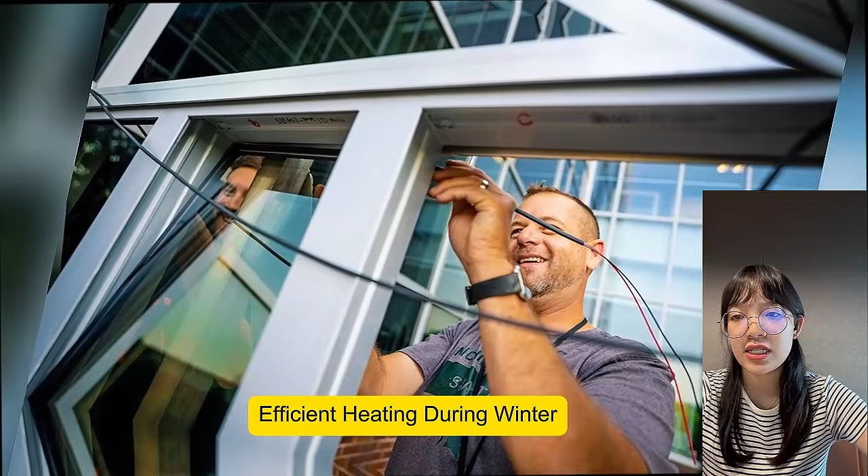Temperature remains relatively stable throughout the year. Geothermal heat pumps take advantage of constant underground temperature to provide highly efficient heating during winter and cooling during summer. By exchanging heat with the ground rather than relying solely on conventional heating and air conditioning equipment, geothermal systems significantly reduce electricity consumption while maintaining a comfortable indoor environment.

Another emerging technology is energy generating flooring, sometimes called kinetic flooring. These specially designed floor panels capture the mechanical energy produced when people walk across them. Every footstep creates a small amount of electricity that could be stored or used immediately to power nearby lighting, displays, or electronic devices. Although each individual step generates only a small amount of energy, busy locations such as airports, train stations, shopping malls, and sports stadiums can collectively produce meaningful amounts of renewable electricity from thousands of daily visitors.

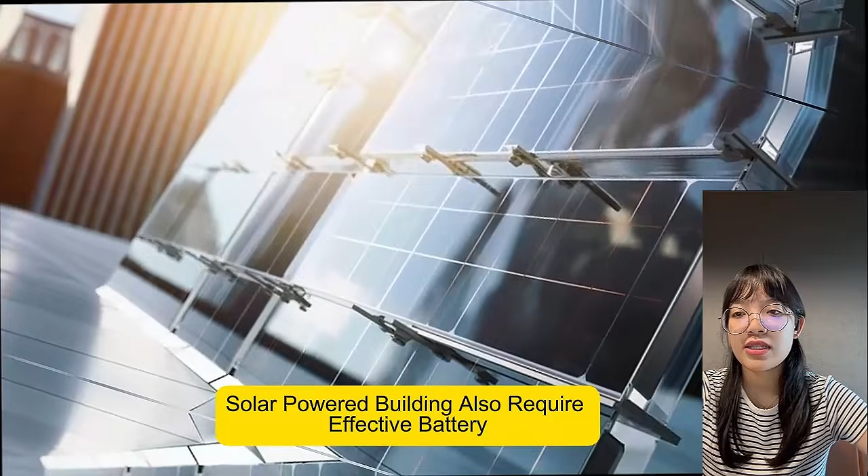Generating electricity is only part of the challenge. Modern self-powered buildings also require effective battery and energy storage systems. Since solar panels produce electricity only during daylight hours and wind conditions constantly change, batteries store excess renewable energy generated during periods of high production. This stored electricity can then be used at night, during cloudy weather, or whenever renewable energy generation temporarily decreases. Advanced battery technology increases energy independence while improving the reliability and stability of building operation.

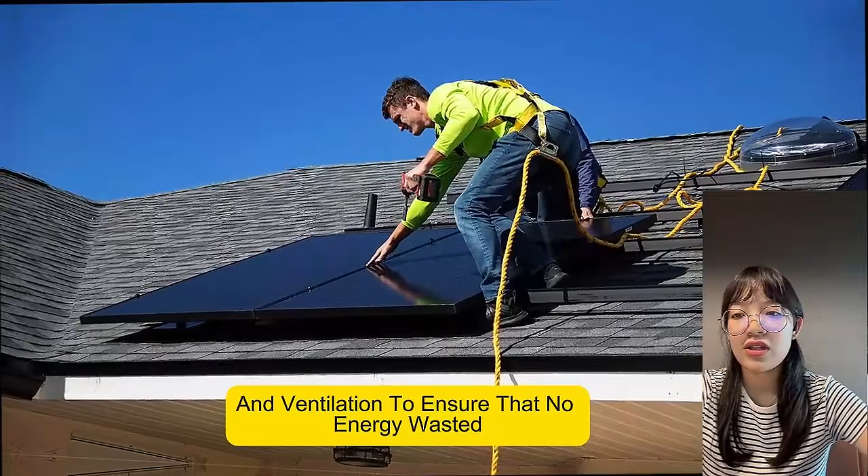Perhaps the most important technology connecting all these systems is artificial intelligence. Intelligent energy management software continues to monitor electricity production, weather forecast, occupancy level, battery capacity, and real-time energy consumption throughout the building. Using this information, the AI automatically determines when to store electricity, when to use renewable power directly, and when excess energy should be supplied back to the public grid. It can also optimize heating, cooling, lighting, and ventilation to ensure that no energy is wasted. By making thousands of automated decisions every day, artificial intelligence significantly improves the overall efficiency of modern energy producing buildings.

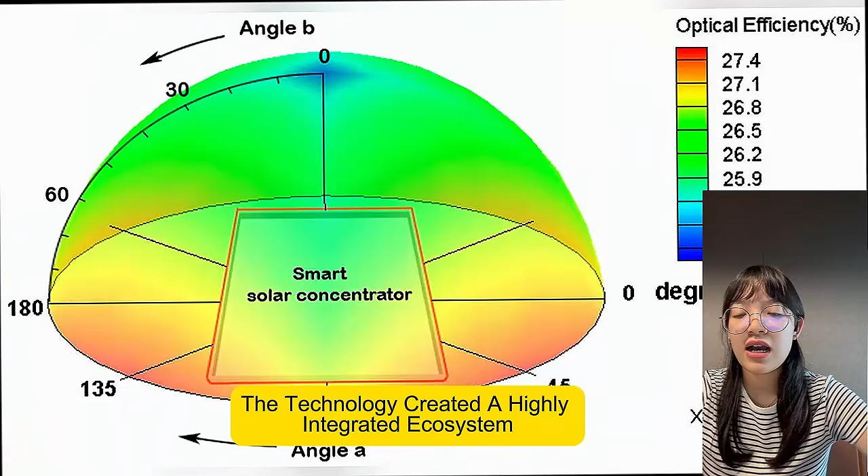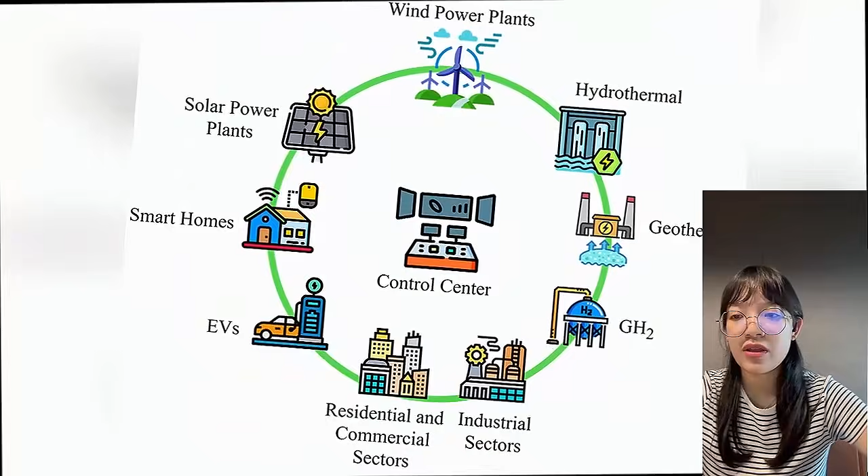Together, these technologies create a highly integrated ecosystem where renewable energy generation, intelligent management, and efficient resource use work hand in hand. Instead of depending entirely on traditional electricity supplied by distant power plants, modern buildings are becoming increasingly capable of producing, storing, and managing their own clean energy. As the innovation continues to expand, solar power buildings are expected to play a central role in creating smarter, greener, and more sustainable cities for the future.

Part A: The future of solar power buildings.

The rapid development of renewable energy, artificial intelligence, and smart building technology is transforming the future of architecture. Experts believe that within the next few decades, buildings will no longer function merely as places to live, work, or conduct business. Instead, they will become intelligent energy hubs capable of producing, storing, managing, and selling clean electricity. Rather than existing as isolated structures connected only to an electrical grid, future buildings will operate as active participants in an integrated energy ecosystem, helping entire cities become more resilient, efficient, and environmentally sustainable.

One of the most exciting developments is the emergence of smart energy networks, often called smart grids. In this system, every energy producing building can communicate with neighboring buildings and the national power grid in real time. If one office tower generates more electricity than it needs on a sunny afternoon, the surplus energy can automatically be transferred to a nearby apartment building, school, hospital, or commercial center that requires additional power. Instead of allowing renewable electricity to go unused, entire neighborhoods will be able to share clean energy efficiently through intelligent digital networks.

Electric vehicles will also become essential parts of this new energy system. Future buildings are expected to include a large number of EV charging stations located in parking garages and underground parking areas. During daylight hours, electricity generated by rooftop solar panels or wind turbines can be used directly to recharge electric cars. In some cases, parked vehicles may even function as temporary battery storage systems, returning electricity to the building or the power grid during periods of high demand. This two-way exchange of energy could dramatically improve the stability of future electricity networks while accelerating the transition to cleaner transportation.

Large-scale battery storage will become increasingly important as battery technology continues to improve. Future buildings are expected to incorporate high-capacity energy storage systems capable of powering central operations for several days during emergencies or extended power outages. Hospitals, emergency response centers, community facilities, and residential buildings could continue operating independently even when severe storms and natural disasters interrupt the main electrical grid. This increased energy resilience will become one of the defining characteristics of sustainable cities.

As more solar power buildings are constructed, they will work together to support the national electricity system, rather than placing a additional strain upon them during periods of high renewable energy production. Buildings can contribute electricity to the grid, while during times of unusually high demand, they can rely on stored energy instead of drawing additional power from conventional power plants. This balanced relationship will improve grid stability, reduce the need for fossil power generation, and lower greenhouse gas emissions across the entire region.

The vision of future smart cities extends far beyond individual buildings. Millions of energy generating homes, offices, schools, shopping centers, and public facilities could form a vast decentralized network of renewable energy producers. Together, these intelligent buildings create cleaner air, lower electricity costs, improve energy security, and significantly reduce global carbon emissions. Rather than depending solely on massive centralized power stations, tomorrow's cities may generate much of their electricity locally through the combined efforts of countless solar power buildings working together.

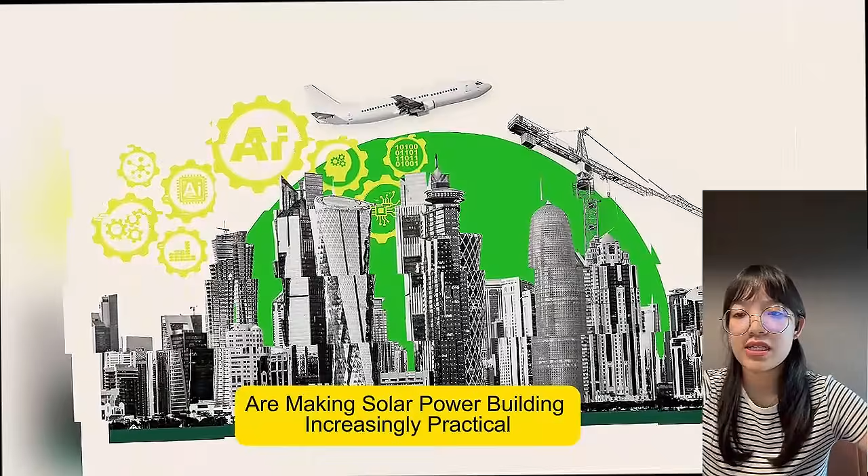More efficient solar panels, transparent photovoltaic glass, better battery storage systems, intelligent energy management software, geothermal heating, kinetic flooring, and smart electrical grids are making solar power buildings increasingly practical and economically attractive.

As renewable energy technology becomes more affordable, the innovation will likely move from exceptional demonstration projects to standard features of everyday construction. Within the next few decades, experts believe it may become normal for newly constructed buildings to generate enough electricity to satisfy all of their own operational needs. Some buildings may consistently produce surplus renewable energy that can be supplied to neighboring communities, effectively transforming entire cities into a distributed clean energy network.

Every rooftop, every facade, every window, every available surface could contribute to electricity generation, allowing urban environments to function as an enormous collection of interconnected renewable power stations.

Perhaps the greatest lesson offered by solar power buildings is that sustainability is no longer simply about reducing environmental damage. It is about creating systems that actively improve the world around us, by harvesting sunlight, capturing wind, utilizing geothermal heat, integrating intelligent technology, and working harmoniously with nature. These buildings demonstrate that human creativity can solve some of the world's most pressing environmental challenges.